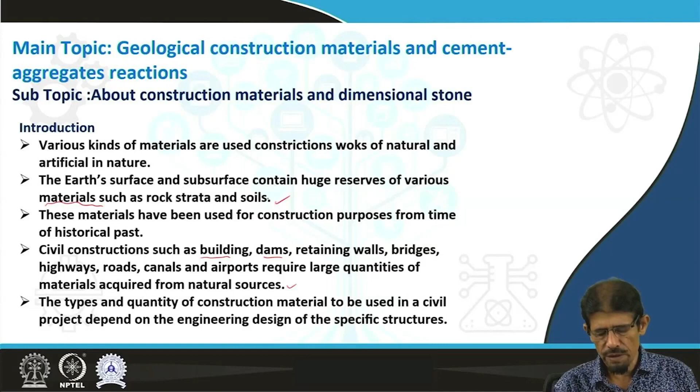As far as construction material is concerned, construction material is any material used for construction of any engineering structure such as rail track or building or retaining wall or embankment or dam or airport or road, etc. You can see the use of natural material as supporting material to railway track. Some of the material is utilized to develop combined material such as concrete to support a bridge. Some of the materials we utilize for construction of walls and others, for development of dams, etc.

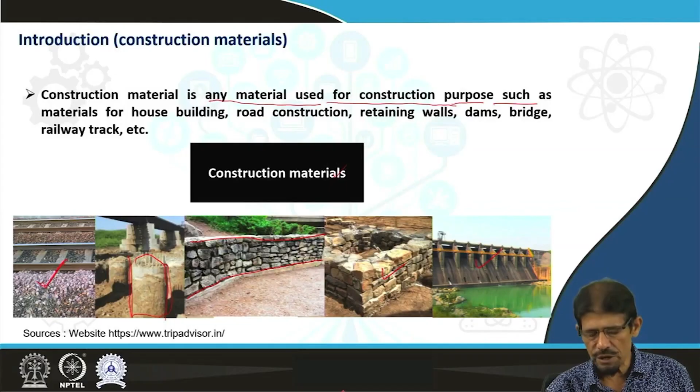As far as the classification of construction material is concerned, we are going to target natural geological materials, man-made materials, and some resources not belonging to geology but available in nature, like wood, water, and others. As an engineering geological discipline, we are more concerned about the natural geological material utilized for construction purposes. From natural geological materials, we are able to make some artificial materials as partial support to the construction work, also recognized as man-made construction material. Besides this, we have varieties of resources available outside the geological domain, such as wood, water, some ash, etc.

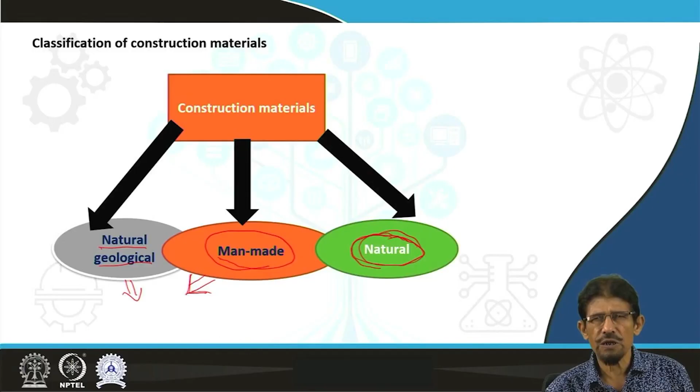One of the important and widely used materials from the historical past, still extending into these modern days for enjoyment, is thatch. This thatch you can see is a very simple natural material utilized for making some temporary shelters. The structure made up of thatch does not have a long life. It is of limited life and recovered from dry vegetation such as straw, water reed, sedge, rushes, heather, or palm branches.

People from the historical past were familiar with making temporary shelters of limited life for proper settlement and safety from heavy rain, high speed winds and wild animals, etc. temporarily. People of the past knew well how to fabricate these types of material for making small to medium sized houses and settlements. These materials were also utilized by some historical peoples for blocking water and other things temporarily, with the use of some soil, some cow dung, etc.

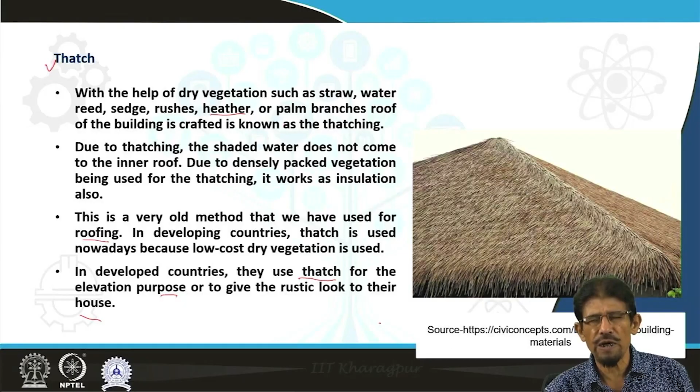In some of the remote villages in India, people are still utilizing such type of material as construction material for making some temporary shelters having a life of 5 to 6 years maximum. Beside this, we have

rock. We have varieties of rock like slate, sandstone, limestone, dolomite, granite, basalt, diorite. Varieties of materials belonging to igneous, sedimentary, and metamorphic rocks. And in addition to this, we have varieties of derived materials also, which lie between soil and rocks.

As far as rock is concerned, rock is a naturally available material and it is used in construction at different places and for different uses. We have ample examples of monuments and rock-cut structures available throughout India and throughout the world as historical heritage structures made up of rocks belonging to different categories like sedimentary, igneous or metamorphic.

When we are going to utilize rock for practical purposes, we have to utilize some parameters for selection of rock. In previous lectures, we have already discussed that our stone men had an idea about the selection of rock based on hardness, durability, porosity, permeability and strength. These basic parameters were utilized for selection of different types of rocks by our ancestors of the historical age.

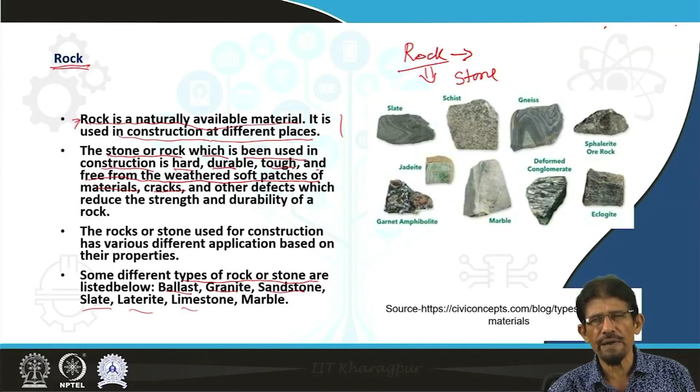The stone used for construction has various applications based on its properties as per the requirements of the engineering project design, and some different types of rocks or stones are listed as ballast, granite, sandstone, slate, laterite, limestone, marble, bauxite, dolerite, diorite, pitchblende, etc.

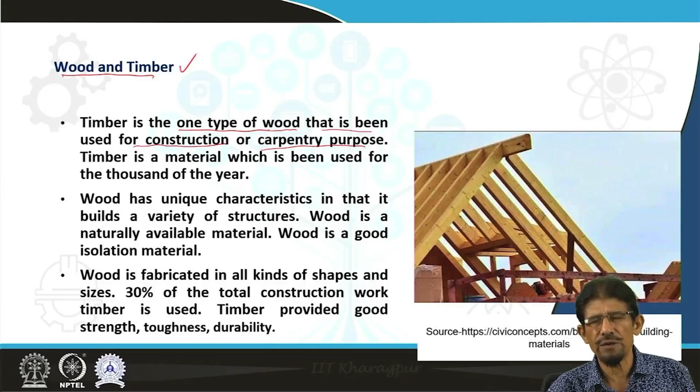The next type of materials belongs to natural resources other than geological materials, like wood and timber. Timber is one of the sources of wood used for construction or carpentry purposes, and timber is a material utilized since historical times to give some supplementary input to our engineering structures. The next important component of construction is a supportive material to the binders, recognized as aggregate.

Aggregates are the most commonly used materials in construction, generally derived from natural geological materials. Nowadays, we have started utilizing some artificial materials as aggregate, but still in major cases we are utilizing natural materials as aggregate.

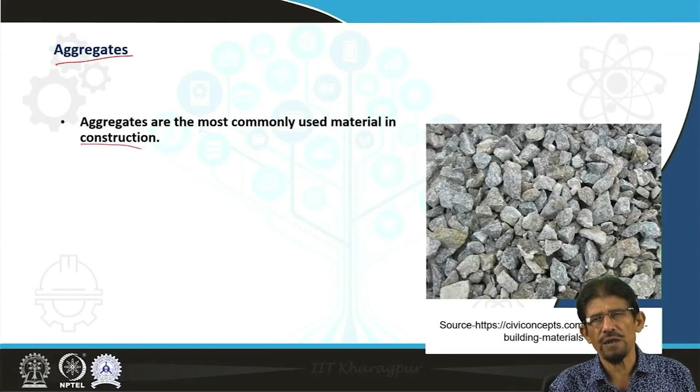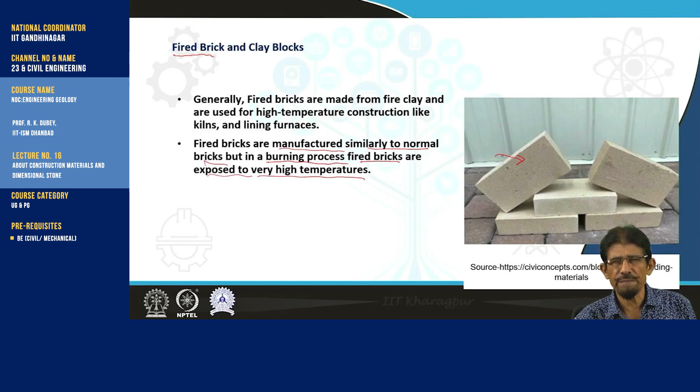Fire bricks are manufactured similar to normal bricks, but in burning, fire bricks are exposed to very high temperature. Normal bricks we utilize for construction of walls and filling the gaps in buildings and others, but fire bricks are utilized for special purposes like making chimneys and others.

Next is a binder recognized as cement, and cement is a fine powdery material derived from natural lime-containing or lime-rich materials or rocks. It is utilized as a binder and sets and hardens quickly, therefore it is utilized to make objects in combined form by mixing the cement with some additional material, and utilized as a mortar or for making concrete.

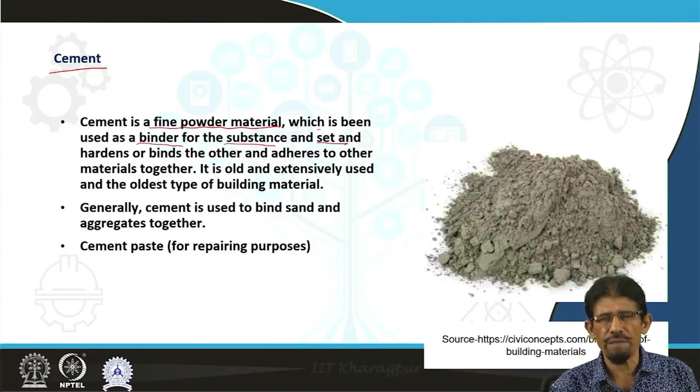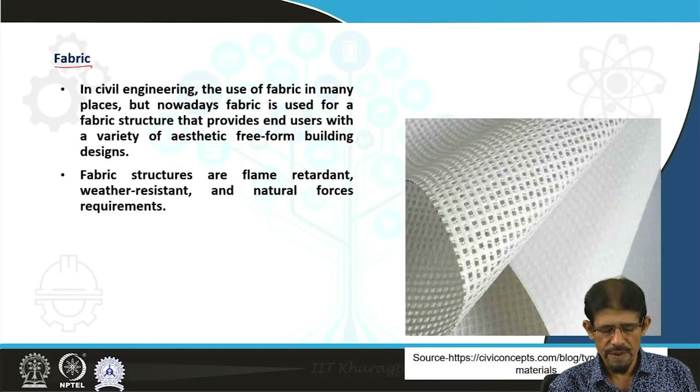Then some fabrics are also utilized as an additional support to make engineering structures beautiful, safe, and suitable as well as hygienic. In addition to this, we are lucky to have a huge quantity of natural materials that we can utilize for construction of civil engineering structures, as the earth's surface contains vast resources of varieties of materials such as rock, debris, sand, sediments, soil, etc.

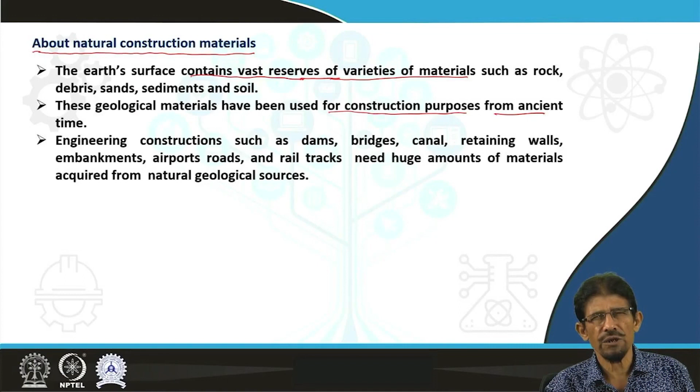These geological materials have been used for construction purposes from ancient time. Engineering construction such as dam, canals, road, embankment, retaining wall, building, road, etc. requires such natural materials for construction. If we categorize or classify natural construction material, it is classified as rock, as cobble, pebbles and gravels, as sand, as soil and clay, and pozzolans.

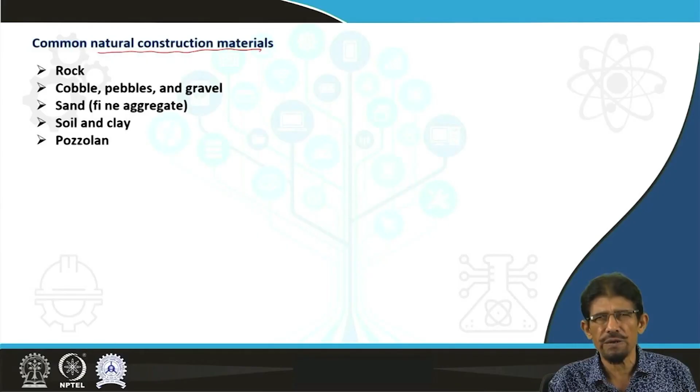Rocks are naturally occurring material that are most abundantly used in civil construction. The hard durable rocks free from deleterious materials are selected for use as stone. The deleterious materials are hazardous material which weaken the constructed structure. Therefore, we generally avoid deleterious material.

Boulders, cobbles, shingles, gravels, sand, silt, clay are the products of rock erosion and are available in huge quantity in our river valleys and other recent deposits like quaternary deposits, and these materials are also utilized as construction material for various purposes. Soil and clay are used in construction of earth dams or earthen houses.

Still in India, people are utilizing earth for making small houses of limited life. Besides the earth dam, we have varieties of structures involving the use of soil and clay. One good example: the core of an earth dam is generally made up of highly compacted soil or clay.

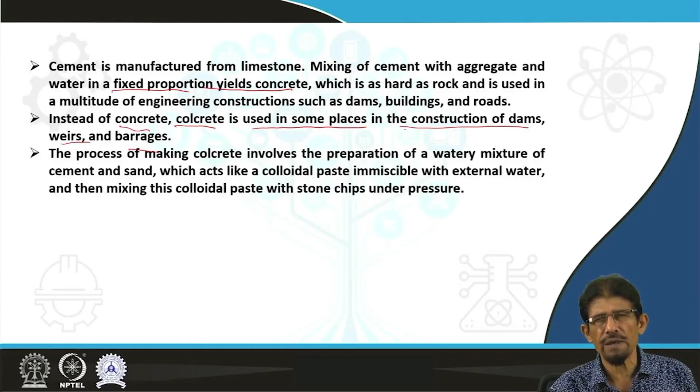Besides this, we also utilize mortar, a mixture of cement and sand along with water, for binding bricks or binding stone pieces, etc.

Attributes and usage of different kinds of construction materials: the major attributes relate to hardness, strength, durability, and compactness. The hard and durable natural materials are available abundantly from natural resources for use as construction material for building or other engineering purposes, and hard rocks are generally used as blocks for masonry work or supportive work.

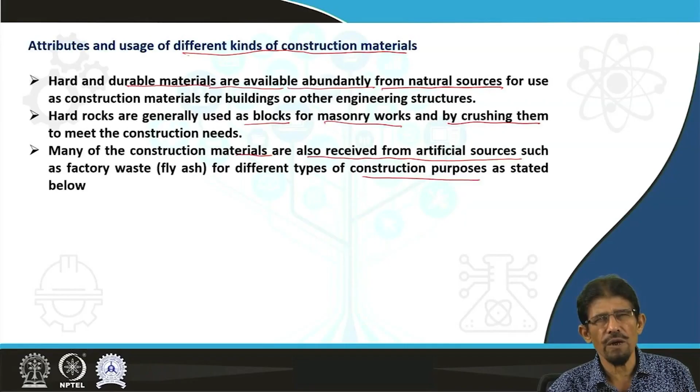Like ballasts, many construction materials are also received from artificial sources such as factory waste, fly ash, due to burning of natural material for different types of construction purposes, as we are going to elaborate in our future classes as well as in this class.

As far as geological construction material is concerned, we can categorize them broadly into two categories. First is dimensional stone and second is crushed stone. The dimensional stone can be further divided as building stone, facing stone, decoration stone, and flooring and roofing stone. However, the crushed stone is also divided based on purpose as road metals, railway ballasts, and riprap.

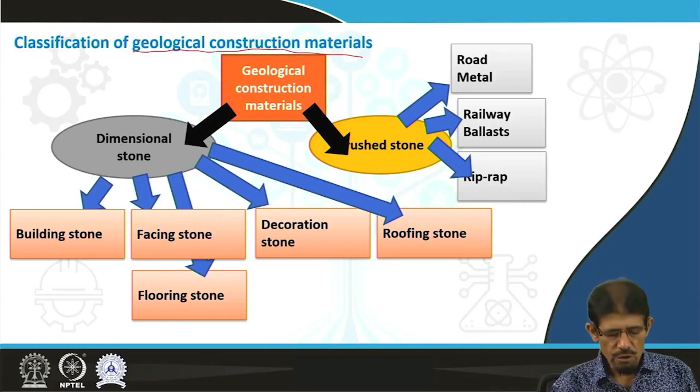So first we are going to define dimensional stone. The dimensional stones are large irregular blocks of rock obtained from rock quarry faces. Dense rock with low porosity and high strength and hardness, but amenable to dressing and polishing, are recognized as good dimensional stone. The dimensional stones are suitable for use as facing stone of walls, as building stone of houses, and like roofing stone, flooring stone, etc.

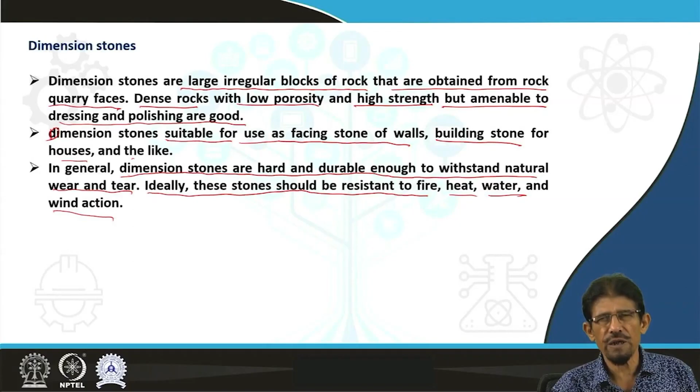In general, the dimensional stones are hard, durable enough to withstand natural wear and tear caused by natural agency as well as human. Ideally, these stones should be resistant to fire, heat, water, and wind action to provide some authentic safety constraints as well as stability.

Dimensional stones are mainly used as building stone for construction of entire buildings and recognized as building stone, or to cover parts of buildings. In historical times, we have examples of many buildings, royal palaces, huge pillars, religious edifices as examples of engineering structures made up of dimensional stone or blocks of rocks. The irregular stone slabs obtained from the quarry face were first dressed into rectangular slabs or blocks and then used in the masonry work of buildings, dams, or any structure.

The mortar used for binding the slabs includes plastic clay, lime, burnt shell, kankar, surkhi, etc. as indigenous material, along with cow dung and molasses as a binder. Use of stone blocks for constructing buildings is nowadays not very popular, but in previous times they were utilized widely for making some settlement-related structures.

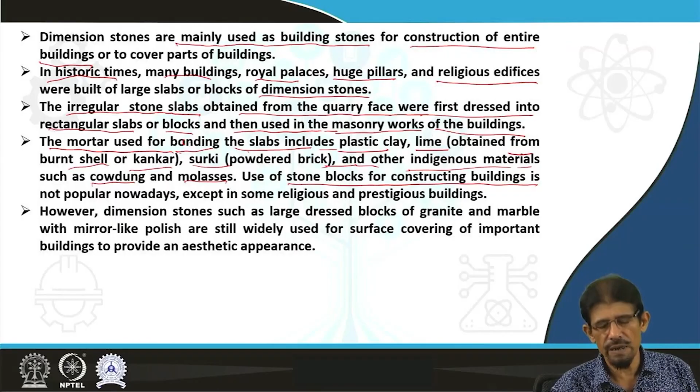The dimensional stones are large dressed blocks of granite and marble with mirror-like polish, still widely utilized for surface covering of important buildings to provide an aesthetic appearance and beauty to the building. One of the examples is the massive mauve colored Vindhyan sandstones, excellent building stones that were used in many historical buildings and are still being used for decorating building walls and floors as well as for masonry work.

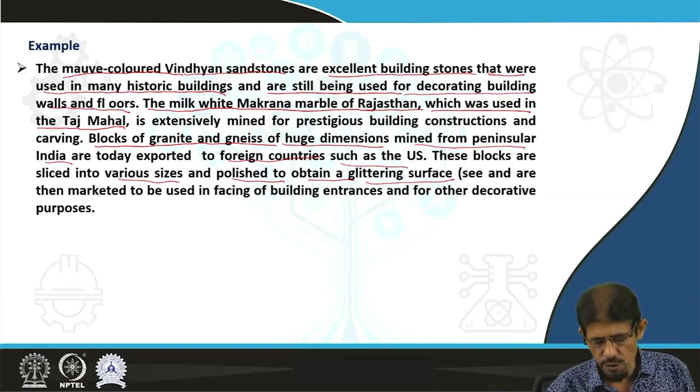The milky white Makrana marble is another example, taken from Rajasthan, which was used in making a number of buildings, and one excellent example is the Taj Mahal. Blocks of granite gneiss of huge dimension mined from peninsular India were also utilized for making a number of historical buildings, or still utilized and exported to foreign countries to earn foreign currency and others. These blocks are sliced into various sizes, polished to obtain a glittering surface and good look, and utilized as decorative stone.

Friends, these materials of elementary nature regarding different types of construction materials belonging to the natural geological domain, and besides geological components, man-made materials widely utilized for construction work, are taken from the engineering geology book written by Gangopadhyay, published from Oxford University publication, with partial support from a similar engineering geology book written by Bell FG in 2007, and then partial support from the textbook of engineering geology written by Kesavulu NC in 2016, and a book written by Waltham T on foundation of engineering geology, acknowledged thankfully for the availability of material regarding these lectures.

Friends, as far as conclusion is concerned, material used for construction of engineering projects is known as construction material, and natural and man-made materials are used as construction material. The geological materials are used as natural construction material, and the major natural construction materials are characterized as dimension stone, crushed stone, aggregate, sand, clay, silt, and soil as well as pozzolan.